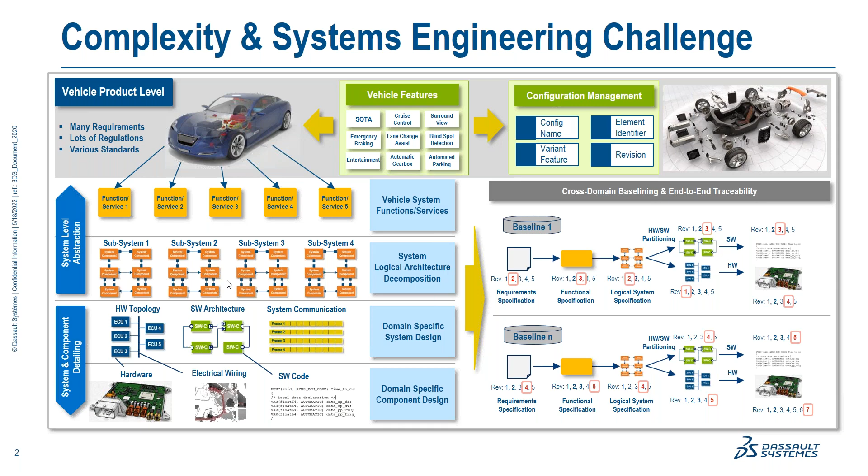And that is what we are calling, what the industry is also stating, model-based systems engineering, making really a digital continuity between and throughout all of the different domains. That's the transformation that everybody is working on now in the auto industry. And that is also a key foundation for our strategy that is based on what we are learning every day at our customers.

So on the one hand side, we are providing a solution to our customers that facilitates them to develop so-called cyber physical systems, which is nothing else than an evolution of what was called in the past mechatronics systems, so meaning systems that can be connected with other systems. So looking at, for instance, autonomous vehicles and the connection to the infrastructure, it's certainly a good example when you have an autonomous car that is getting connected and embedded into the parking system of a city infrastructure. That's certainly a good example for a cyber physical system.

And one of the key assets that we from DS bring to the table as part of model-based systems engineering collaboration is a platform-based solution that uses a data model that facilitates a digital continuity between all of these different stakeholders and members as part of the engineering processes, with the overall goal to increase and improve the efficiency throughout the entire engineering processes and to fully digitize these processes.

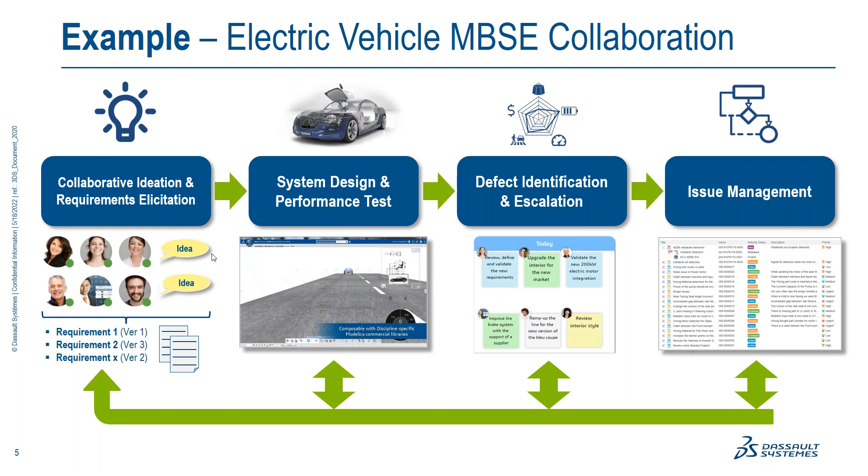And then we are also going to see that we are going to detect a problem with our current implementation. And that problem is being picked up and escalated, and we start to turn that into an issue, and we're going to manage that issue. So that's an example that shows very nicely how we connect the different steps as part of a process to bring together all of the stakeholders in a fully digitized process. All right, so let's take a look at this little example.

So what we are seeing here is the graphical user interface of the 3D experience platform, where we have the different roles, and each of the roles has so-called apps to do the job. And we are starting in 3DSwym. This is a collaborative team environment. It's like a community system where people can make posts in this community. Others can finally like it, make comments to it.

So it's about starting the ideation process on a relatively high and abstract level to gain insights, collect ideas, opinion for things that should later be turned into formalized requirements. So these are the people that are finally working on the project. You see people from different domains, each has a particular role in that project.

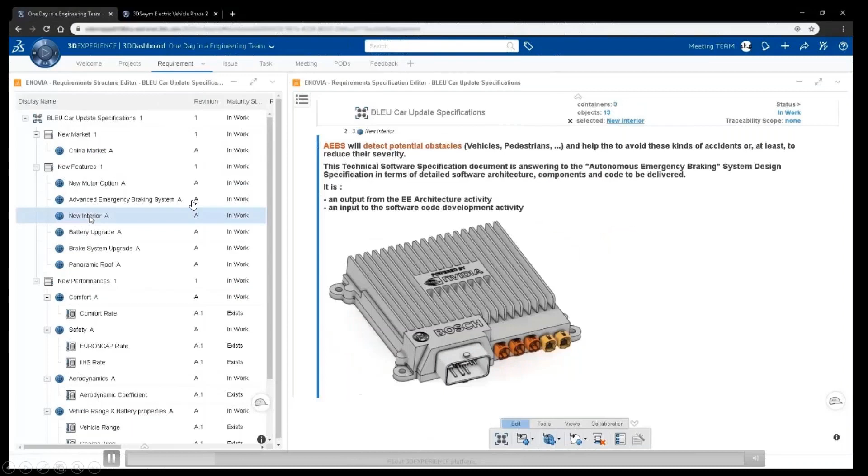So we have picked some of the ideas and started to turn it into really formalized requirements. This is our requirements management solution. You see on the left the requirements objects. On the right, you see the detailed description for each of the requirements.

So we are now going to set up a meeting with our team in the 3D experience platform because we want to review the status of our vehicle project, because there's primarily 2 things where we have some problems that we need to really investigate a bit more in detail. One is relating to the battery and the other one is relating to the powertrain part. We are currently exceeding the budget that we have been targeting, relating to the battery and the powertrain part.

And for the powertrain, we are investigating a new solution from another supplier, and we want to embed a new motor. But we have to test if the performance of that new motor is really meeting the performance needs of our car. So we go back to our requirements solution that we have seen already previously, and we have one requirement defined, which is a quantified requirement in terms of the acceleration of the car, so part of the overall user experience that we want to provide to the customers buying the vehicle.

And that acceleration from 0 to 100 should occur within a certain amount of time, and that is certainly a key performance factor that we want to now verify. Yeah, so we change that, it should be 3.1 seconds. And we have derived from our requirements a functional system architecture for the powertrain part that was created in CATIA Magic in SysML, and I then imported it into the 3D experience platform.

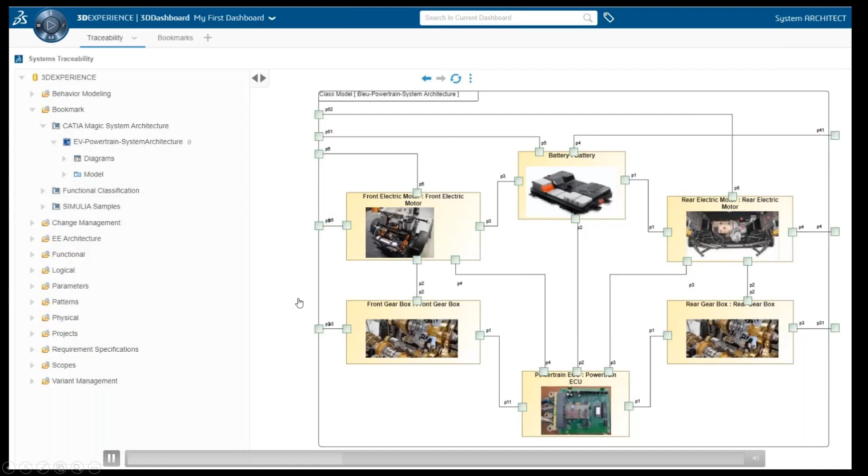And this one is going to be equipped also with a simulation model underneath to finally evaluate really the performance of our vehicle. So you see the same architecture here, and that is equipped with a simulation model underneath. So we see, for instance, here an evaluation of the performance. At the moment, we see the acceleration. It's not addressed yet. So we have to run a new test with the new system.

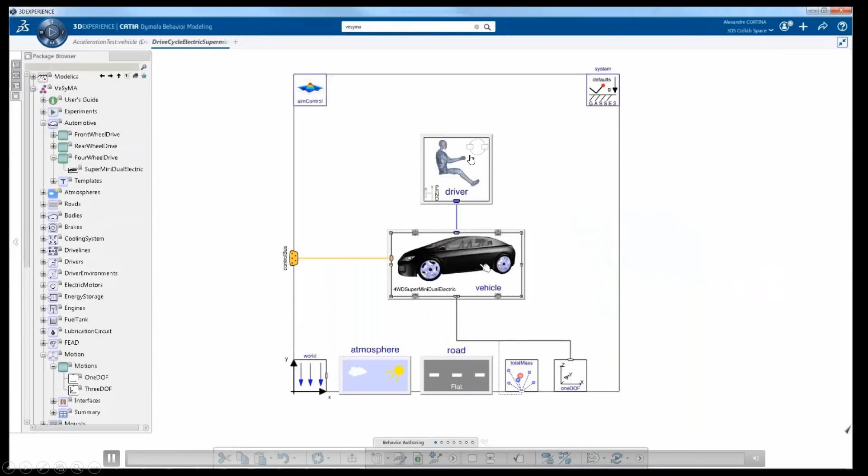And the test is being done based on the Modelica model that we simulate with Dymola in the 3D experience platform. So this is at the end of the day nothing else than an executable digital twin that we can put on the virtual test track to assess the performance of our system. We see from 0 to 100 we are at 2.9 seconds. That's good, so we have met that requirement.

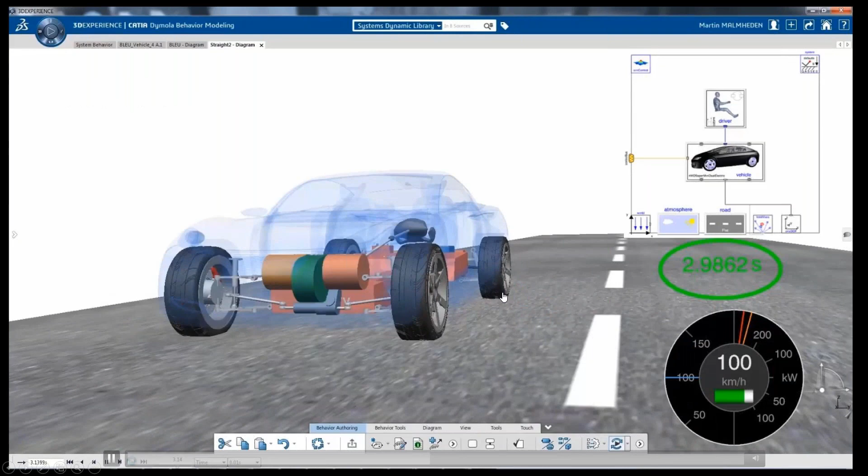Okay, but we also have another experience in our car, and we have some level of autonomy in form of an autonomous emergency braking system. Yeah, and from the test it occurred, we seem to be having a little problem with this one.

So if we have a technical problem, that means we have an issue here. So that means we need to file an issue against that because we want to resolve that. So that's another continuity. We can directly go from our requirement solution into an issue mode. So that means we can start to create an issue directly from the requirements, give it a description to say, okay, the obstacles are not properly detected.

And then we want to also escalate it because we are really getting to our deadline. And it's actually a high priority, of course, and it's a defect that we have encountered here. So we give also a hint for the resolution because we have recently made a software upgrade, and we believe the problem is most likely relating to that. But at the end of the day, it's up to the guy that finally has to investigate the implementation, or is in charge of the implementation. So the test procedure is actually specified also in the test specification, a different document here in the platform.

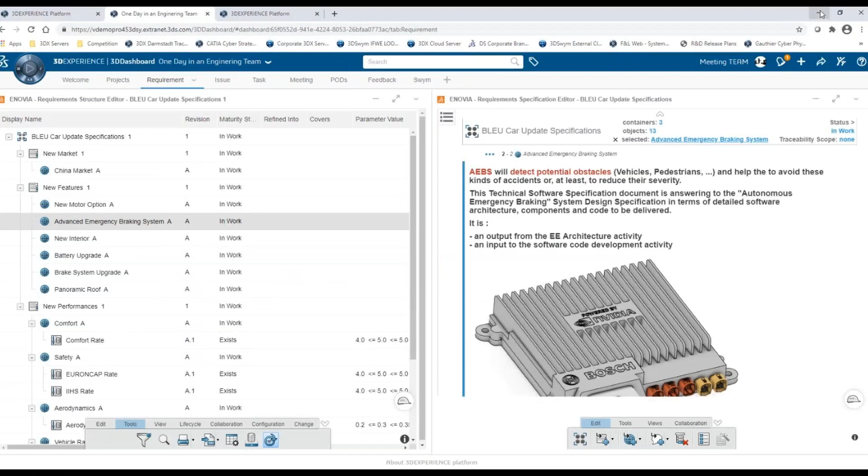So now we go into our issue management list from here. So we switch the view. We go back into another tab of our dashboard solution. And we see here, there's a new issue that has been created. And you see the list of issues where I am actually involved in. And it's the new one that I just created. And you see the test case is automatically associated to it because I've right away created it from the requirements app.

Now I can add also additional information. I add also the artifact of the software to the test case itself. I don't have to, but the more precise I am, the better it is to understand the issue and to deliver all the attachments to it. And now I have to assign also a person to that. In this case, it's Romain, our software engineer, who is going to follow up and is now in charge of pursuing and fixing that issue.

I think this example here gives you a very first idea of what we mean when we speak about a digital continuity as part of a model-based systems engineering collaboration using the 3D experience platform to fully digitize an engineering process. Of course, there would be other pieces following after the issue creation, but for a first part, this is already a well-digitized process.

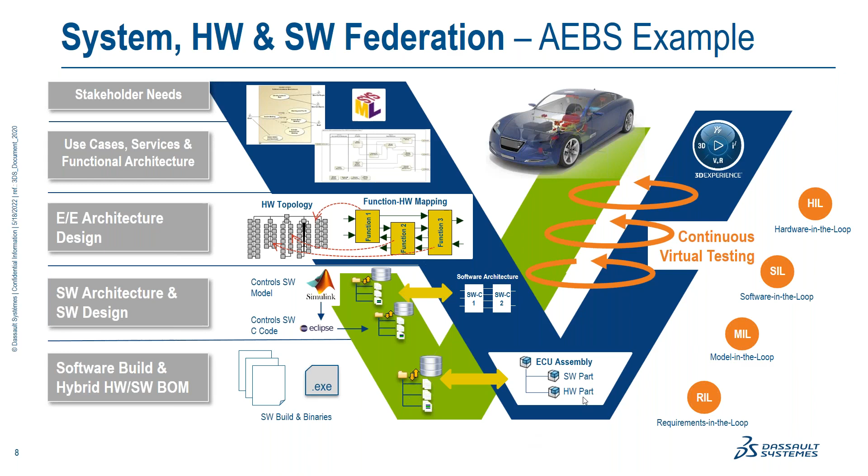We will see in the next demonstration how we can keep up continuity between all these different assets and content by building full end-to-end traceability from the initial requirements, over the architecture, down to the EE architecture, into the software architecture, and even into the software code hosted outside of 3D Experience in an external Git repository. We can even go so far as to build a hybrid BOM, a mechatronics BOM, where we combine hardware elements and software elements.

Before we go into the demonstration, one of the things we've seen initially is that, aside from the actual creation of engineering content, we also have the capability to build continuity between the actual project management and the engineering execution.

We often see at our customers that for the project management part of their complex projects, people use software where they sketch out the complete project plan, including the schedule, the tasks, and finally the resource planning to make sure everything is staffed and on schedule. That software does the project planning quite well, but usually it doesn't have continuity into the actual engineering execution, particularly into the tools used by the different engineering teams.

This is very different with our platform-based solution. When you use our project management solution, you sketch out the project plan and the different tasks, and all of these tasks have direct continuity into the actual engineering execution. That means when you define a task, it shows up in the collaborative task management dashboard of the engineer who has to work on that particular task.

You can assign or attach inputs to that task, such as a specification that helps the engineer do the next level of downstream engineering work, and he can return the artifacts he has created. The benefit of that strong continuity of project management into engineering execution allows you to keep full track of where you are with your project.

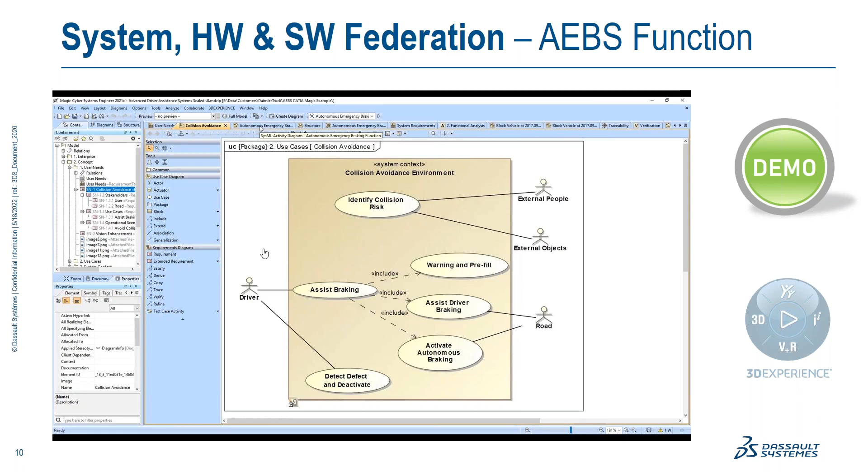Okay, so let's take a look at another demonstration that shows how we bring all of these things together, in particular for the AEBS system, and now not only the engineering execution that we've seen in the V diagram, but also combining that with project management.

What we are seeing here when we start this demo is actually our project management app in the 3D experience platform, where you see, for instance, the schedule of our project. We have a project space here with different phases of the project, individual tasks, and people assigned to them. You can also display that as a Gantt chart, which we will see later on in the demonstration.

So there's a couple of things that we have to work on. One task is, for instance, defining the vehicle functional system architecture. That will be a primary task now in the beginning. We also have a KPI view for the projects, where you see at a glance where I am right now with my project, and where we have some problems that we finally need to follow up on.

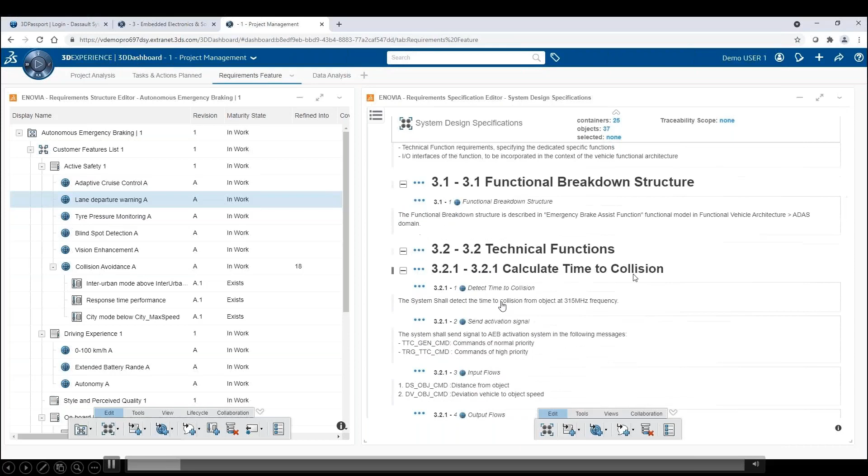All right, so let's start now with the actual engineering execution work. We have queried out some requirements for our autonomous experience. Aside from the AEBS, there are also a couple of other ADAS features that we have sketched out as requirements that should go later on into the car. Some of these requirements relate directly to the AEBS system.

So these requirements that we've authored in the 3D experience platform can be directly synced with CATIA Magic through Data Hub, which is a solution to bring the requirements directly into CATIA Magic. That can happen fully automatically - you don't need to move around any files or something like that.

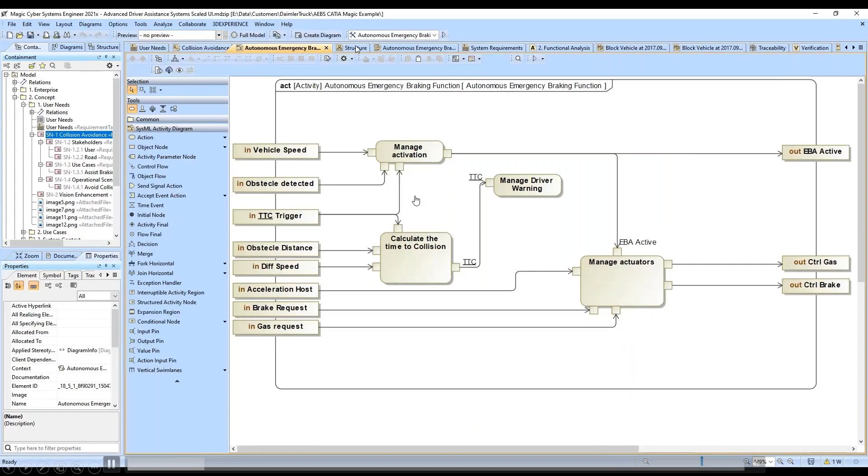So now we have these requirements in CATIA Magic, where we are using SysML to do an analysis of those requirements and to sketch out later on a structure of our system that should then be implemented. That means we take these requirements, start to build use cases fully compliant with SysML, and investigate the functions and services using activity diagrams that will be needed to materialize the requirements. Then we end up with a first level structure for our system.

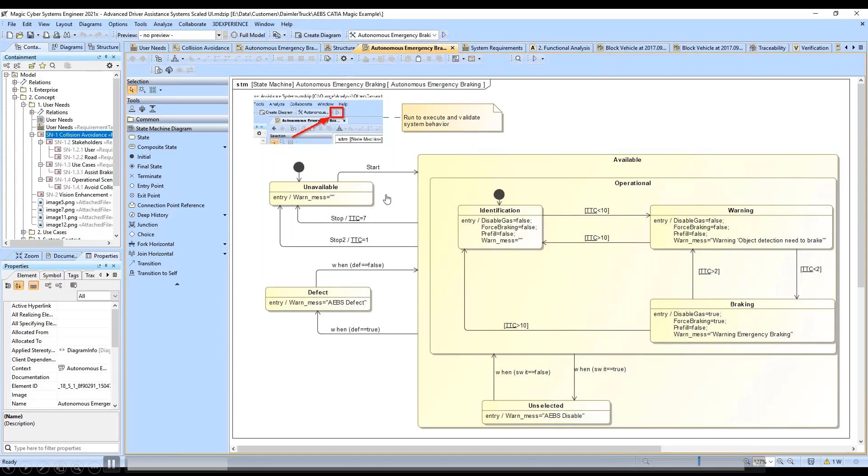And of course, in order to describe the behavior, we have created a first algorithm in form of a state machine that reflects and mimics the behavior that we expect from the AEBS system. The really powerful thing in CATIA Magic is we can simulate all of that stuff - we do not need to produce code for that. We can do that right away in the model and run a simulation of the functionality to assess if the behavior of the algorithm is properly materialized.

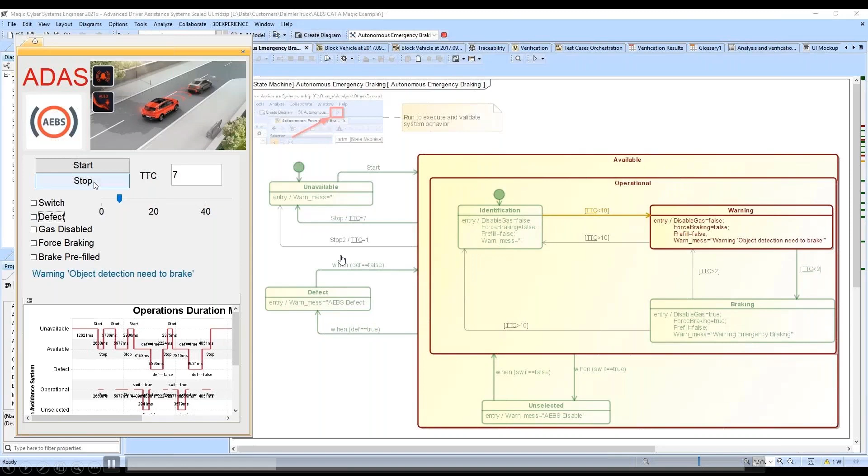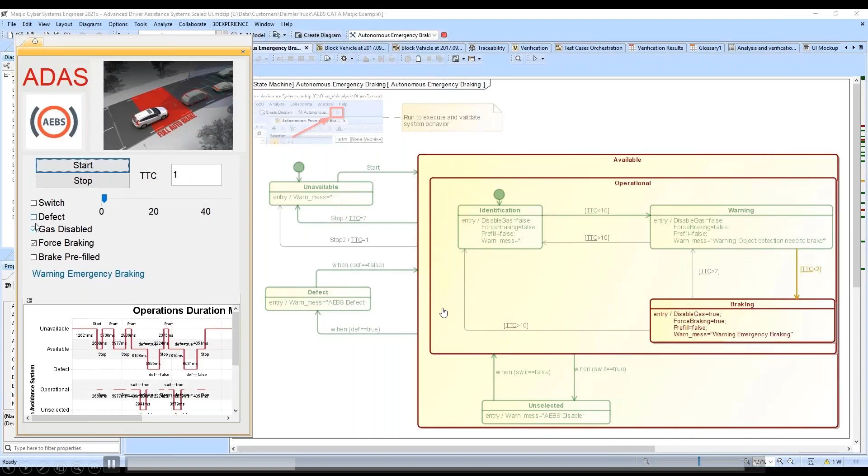So we are playing around, for instance, with the time to collision here, but also look at different conditions - what if we turn on and turn off the system, or if there's a defect? We see the algorithm moves into the proper mode. And then we decrease, for instance, the time to collision, meaning the car in front of us is getting very close, and it's getting super close. Now it means we have to deploy a full brake, and we see the algorithm is doing the right thing. So we have first tested our system and we see it's properly functioning.

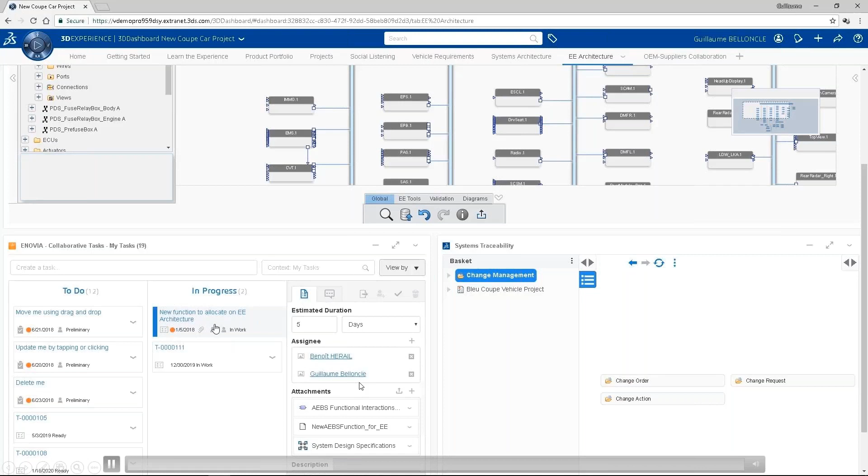And we have directly attached also from the upstream part all the specifications that were created upstream, so that we have a continuous starting point for the guy that is now in charge of the allocation for the EE architecture. You see on the one hand side the textual requirement specification, and we see now the functional interaction chain that

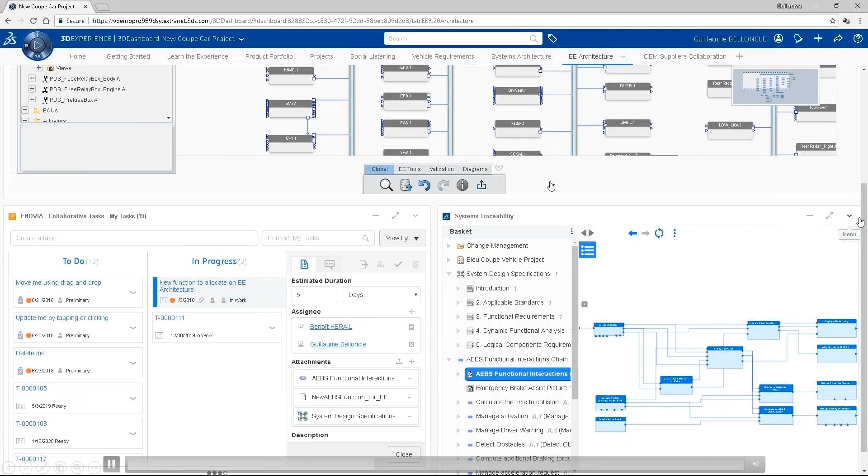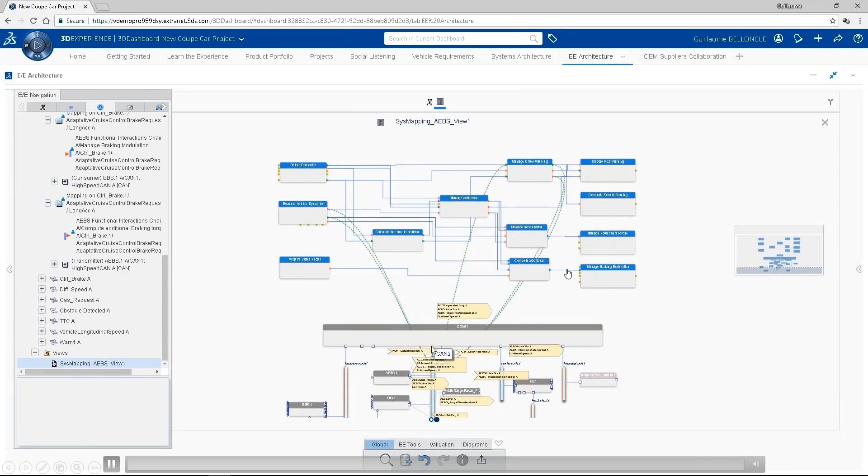was previously sketched out in CATIA Magic. So this one has now been allocated onto the EE hardware topology. I've done that already up front. And we see when we select this function here, we see on which ECU this is going to be hosted. Or if we do it the other way around, if we select one of the ECUs, we see which functions

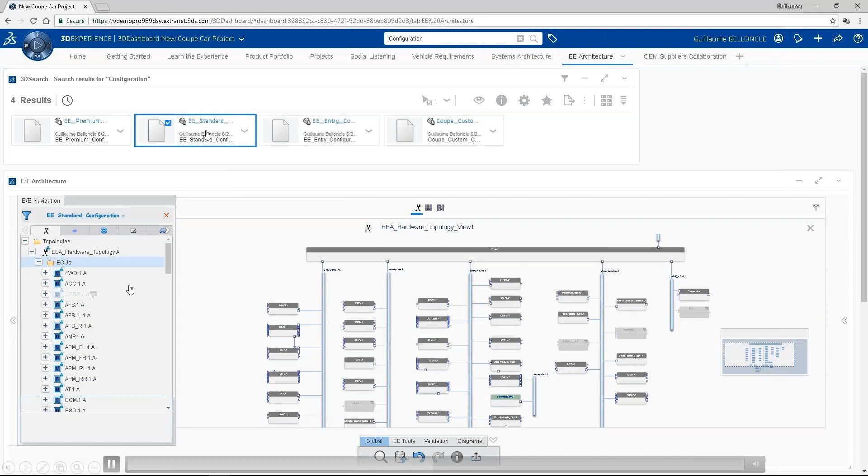it is hosting. So very nice traceability of the allocation. This stuff is also fully integrated into our variant and configuration management, which is an important part for automotive applications. So I have a bunch of configurations, vehicle configurations here defined. When I apply them to my system specification, I see that some components are grayed out. These ones are not belonging to these configurations.

So you can very easily do variant configuration management based on the 3DEXPERIENCE platform. We can also do some first computation and estimation, for instance, of the bus load of the system.

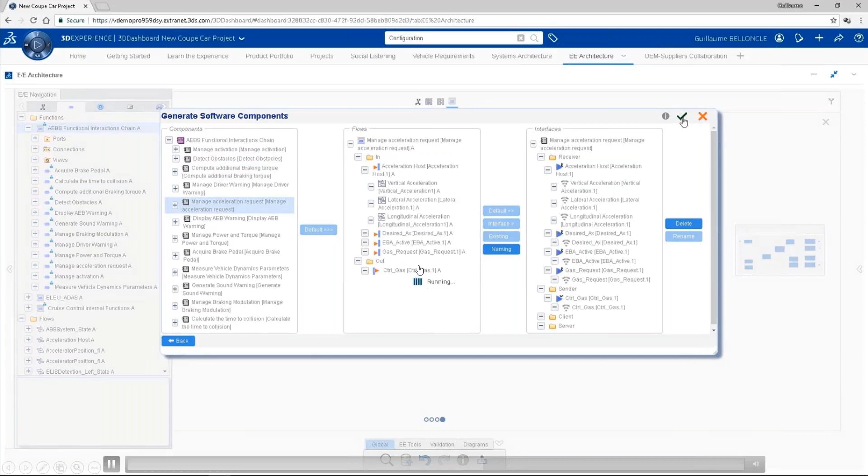So in the next step, we need to get now from a functional architecture to a software architecture. And as previously said, we have a continuity in the platform where you can synthesize that automatically. You also can do that manually if you prefer. We provide both ways to do it. But this is part of our digital continuity in the platform. So that will be the software architecture with the different ports and interfaces.

As I said previously, at the end of the day, we want to get down to an AUTOSAR compliant software implementation. So what I've done now based on the software architecture that I previously synthesized, I've taken a small part of that and exported that as an AUTOSAR XML file and brought that into our DS AUTOSAR authoring solution, which is called AUTOSAR Builder. This is a Dassault tool where you can do the authoring for the AUTOSAR application layer software.

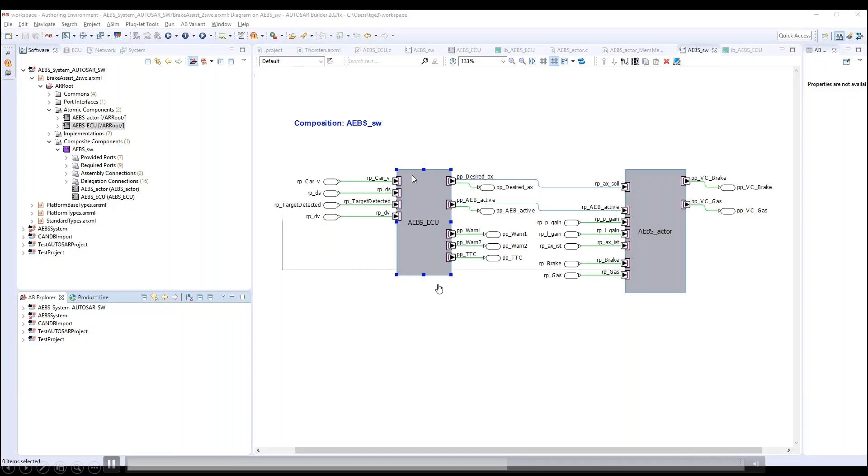So we see a software composition here, including two atomic software components, which has been authored in a fully AUTOSAR compliant fashion, where you have the different ports, for instance, for the atomic software components. When we go onto one of the atomic software components and go into the details, we will see the different port definitions, and we will also see that this atomic software component also has an internal behavior.

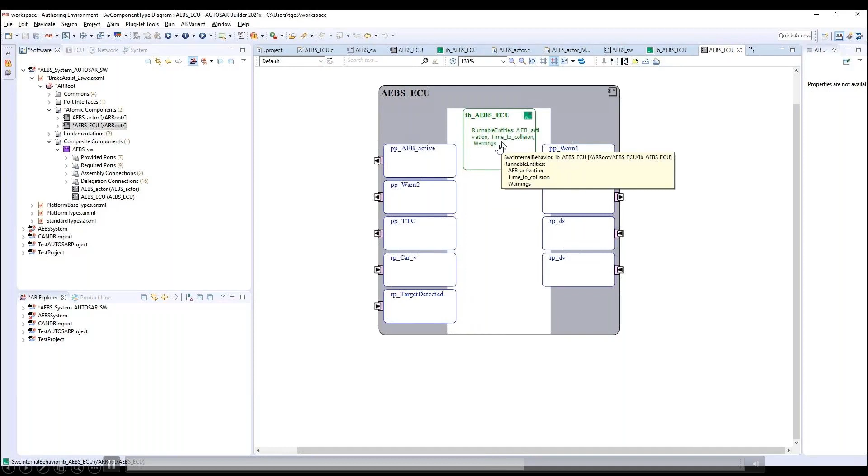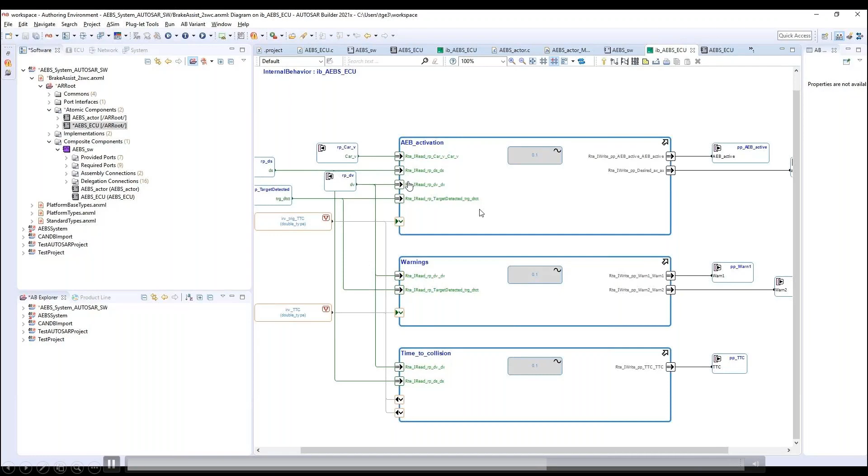This is part of the more detailed refinement now to do really the detailed AUTOSAR-based authoring. We see, for instance, 3 different runnables, and each of these runnables is becoming exactly one C function later on. So fully compliant with AUTOSAR, where we also have the RTE access points and APIs that let these functions talk to other functions in the car. It's a very important thing and part of the AUTOSAR standard, because it makes it very easy later on for

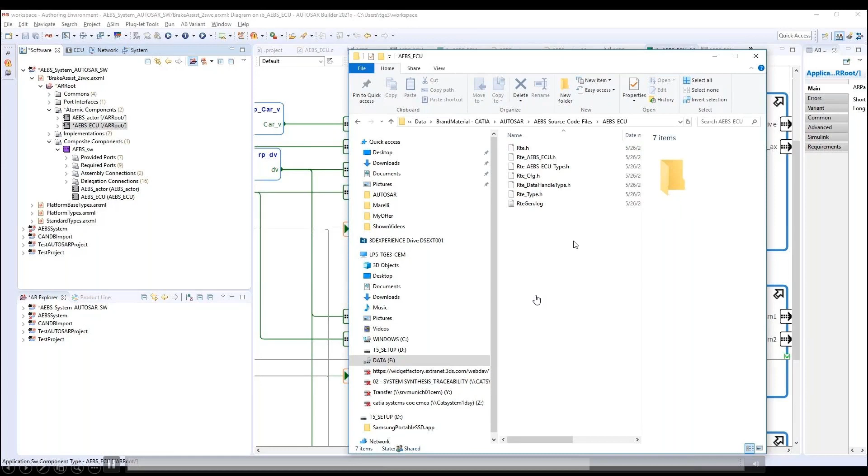the application software developer to connect this application code to other software components. So one thing that we can do now is the so-called RTE Contract Phase. It means that we are producing all of the header files that include the RTE API descriptions, because this is part of a contract, for instance, between OEM and supplier, where the OEM may deliver, for instance, the header files to the supplier to specify the interfaces, the inputs and outputs.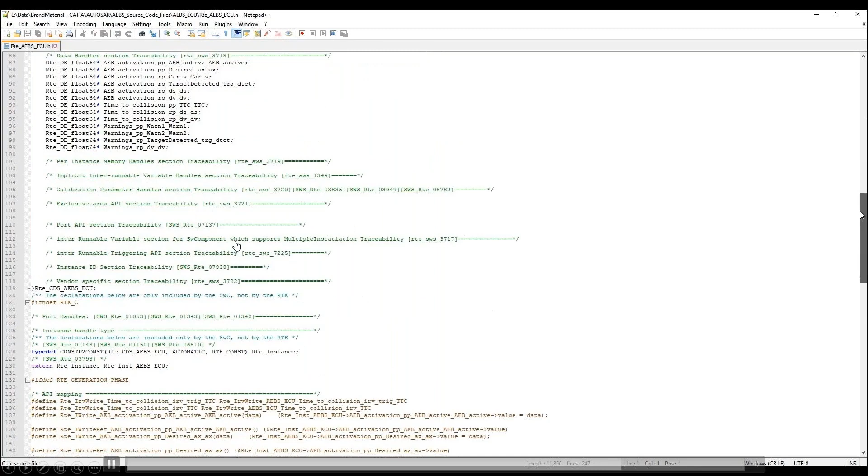So we see the different RTE API functionalities, and these are the functions that later on the software developer would use to connect his software function to the inputs and outputs and have it communicating with the rest and other software functions. We can also produce for the different runnables templates, so which are then primarily the bodies of the C functions that would later be deployed on an ECU, so turned into a binary and flashed onto the ECU.

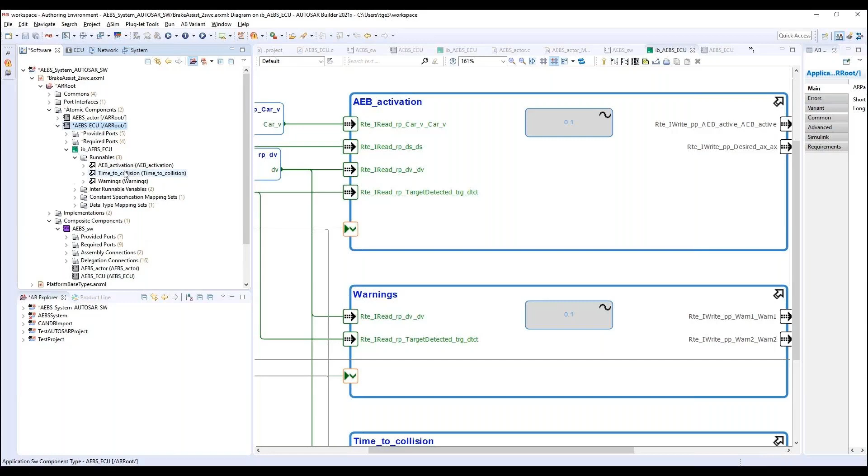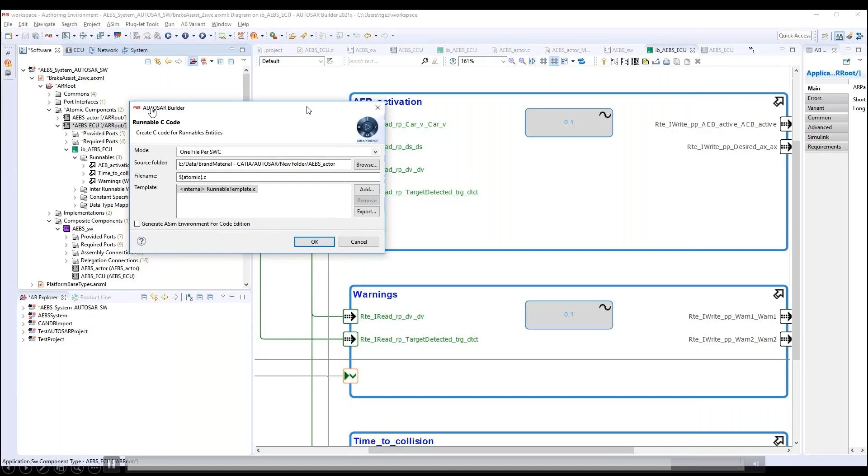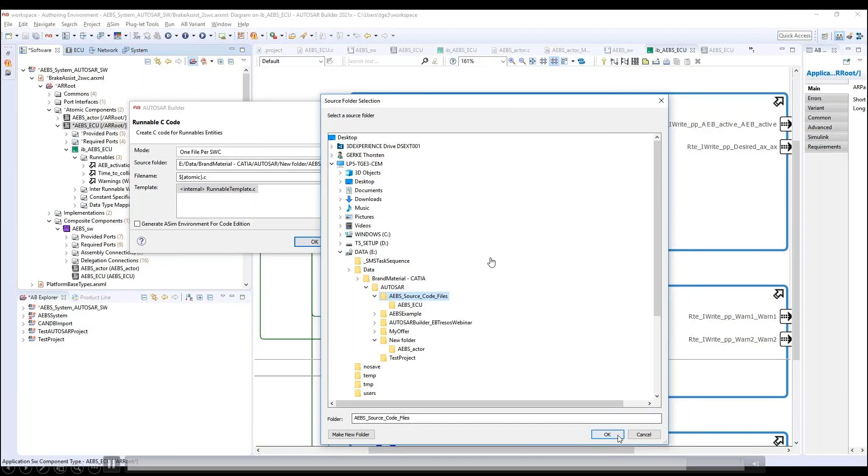So we have a couple of templates that are predefined. When we go to runnables generator, we can use one of the default templates. You can also create your own template, and then we can produce from that description here some predefined bodies for the different C functions. So we just select the place where we want to store that material, click on OK, and then we produce the code or the body for the different C code functions.

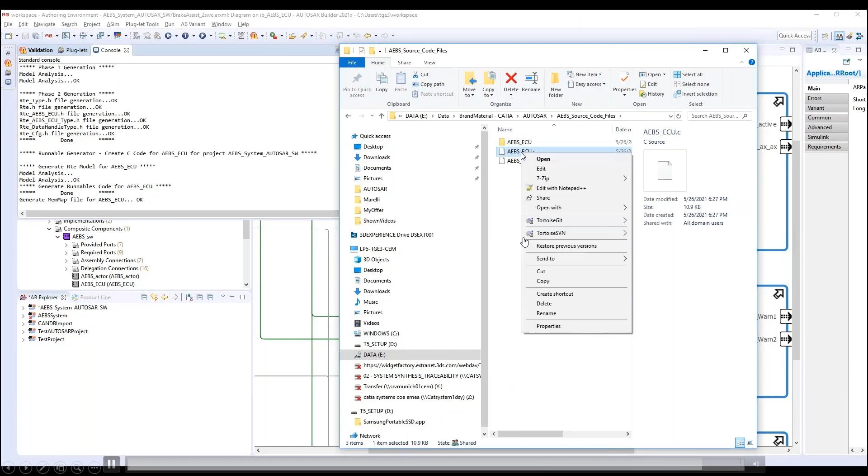So when we open one of the source code files, we see, for instance, here on the one hand side, the header file that was previously created in the RTE Contract Phase.

And further down, we see then a definition of the runnable, where we see the body of that function predefined. And we have here the inputs, the outputs that were part of the RTE Contract Phase definition. And the application developer can then place his code here and connect that to the inputs and outputs. So very easily.

All right, I think that's also a very interesting example that shows another facet of a continuous approach in a model-based systems engineering fashion, how you can develop a software-based function, really starting from the initial requirements over to the design of a functional system architecture using CATIA Magic and SysML, and then go into the detailed domain design of an EE architecture and further down to the software implementation. So this was, let's say, continuity on the design side, on the left side of the V.

But what I've said previously is also that we can do an end-to-end traceability. So what do we really mean with end-to-end traceability, and what's the value of using traceability at all? People like you that are working every day on these kinds of applications, I'm pretty sure many of you are also dealing with standards such as ISO 26262 or Automotive SPICE. And these standards, for instance, explicitly demand traceability in the entire process. And there's a good reason why that is the case.

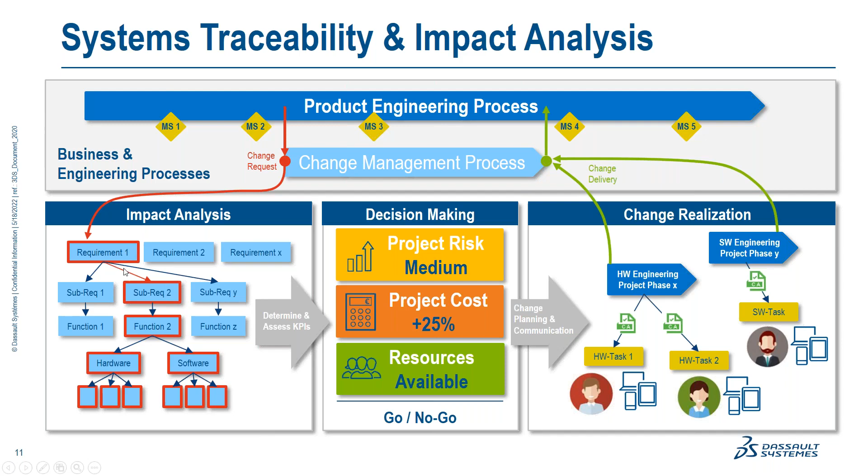And systems engineering, in the form of a model-based systems engineering approach that includes an end-to-end traceability, can exactly address that task. Meaning you can quickly figure out with an impact analysis, if you have full traceability, what are the things that are going to be impacted if we were changing that requirement. So how can we do that? Let's take a look at a typical example of our customers in the auto industry for an end-to-end traceability.

So this example here, aside from showing the end-to-end traceability, also aims to show the openness of the platform, because we are bringing content together from various external resources, repositories, and databases. So we see here, overall, again our AEBS system that we have seen previously, but now in a traceability view.

We have here on the left a whole bunch of requirements. We have, for instance, some requirements that were created in DOORS. These requirements are also managed in DOORS, and we just look into the DOORS database and make that part of the traceability. We have some requirements also sketched out in PDF and Word, and we can build that into the traceability too. And then we have our functional system architecture that was carried out in CATIA Magic, and the data is stored in Teamwork Cloud, so also managed externally.

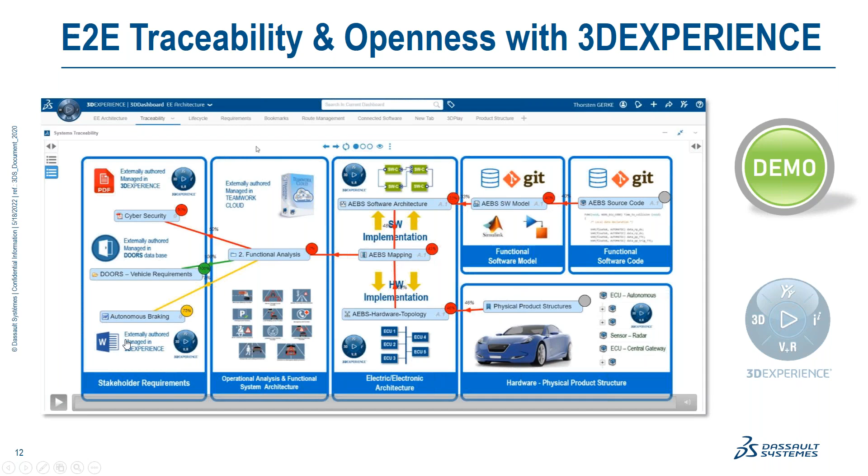And then we have done the partitioning, which pieces go into hardware, which pieces go into software. The software elements, for instance a Simulink model for the controller as well as the source code implementation, are both managed externally in Git repositories. And then we have a hardware part that relates finally to the ECU, and that's managed directly in 3DEXPERIENCE. So let's take a look at how we can do traceability on all of that.

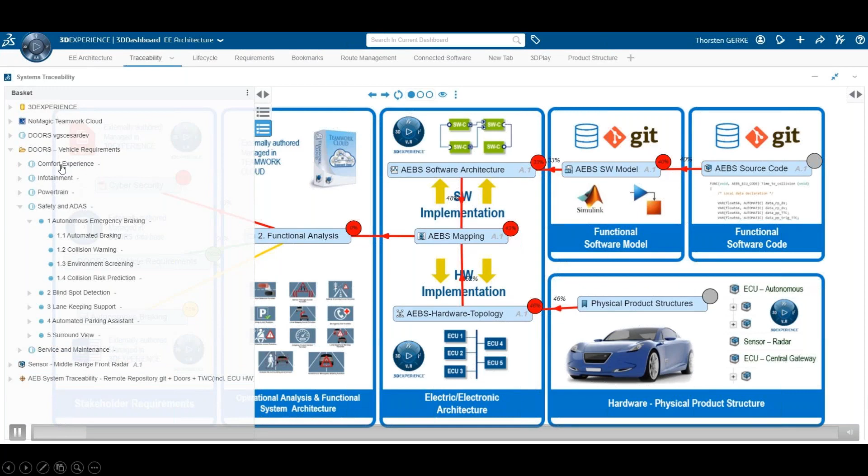So the first thing we want to look at: you see here in the tree all the requirements that are available in DOORS. This is the DOORS client here. I've created some functional requirements in DOORS and stored them in the DOORS database. And we just link into the DOORS database, so we don't duplicate any information. So let's go into the traceability graph. We see these lines here. These are the traceability relationships and links between the different artifacts on the different layers.

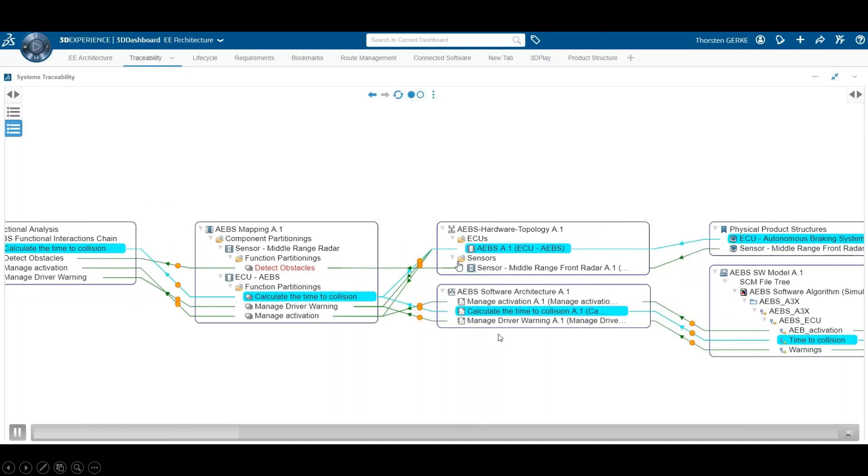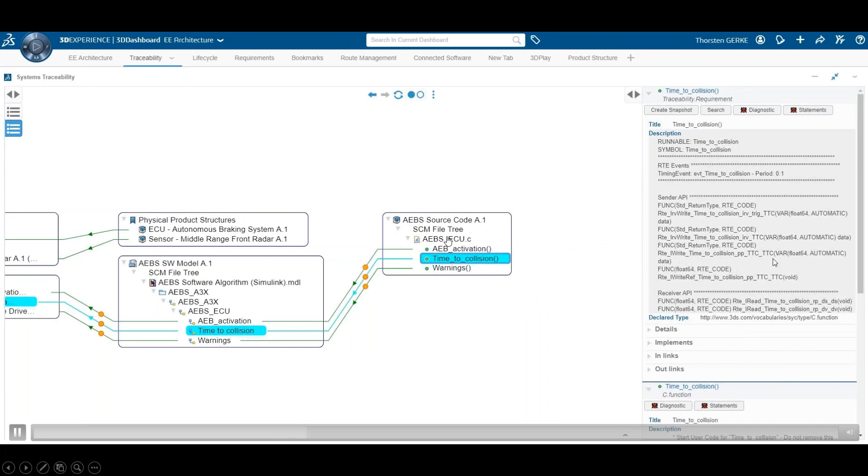And when we select the requirement in DOORS, we see in impact mode right away which elements in the downstream path would be impacted if we were changing that requirement. And this goes even down to the software, which is stored in an external Git repository. Now you see the impact analysis right away points us to the function in the code. So we do not need to search for it. The impact analysis does the job for us.

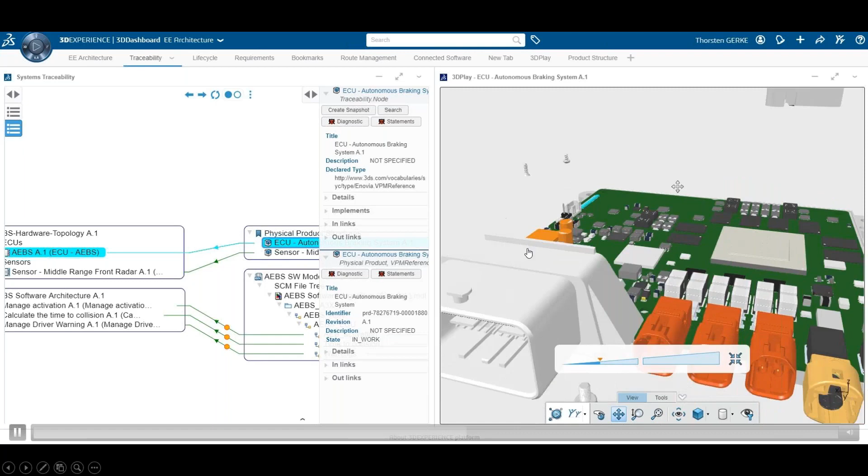From this engineering BOM here, we see that element was also affected. This is, at the end of the day, the 3D CAD for the ECU that would finally be impacted. And we can go down to any level of the traceability. You always need to make a trade-off. How far do you want to go with the traceability? Because it's something that also needs to be maintained over time.

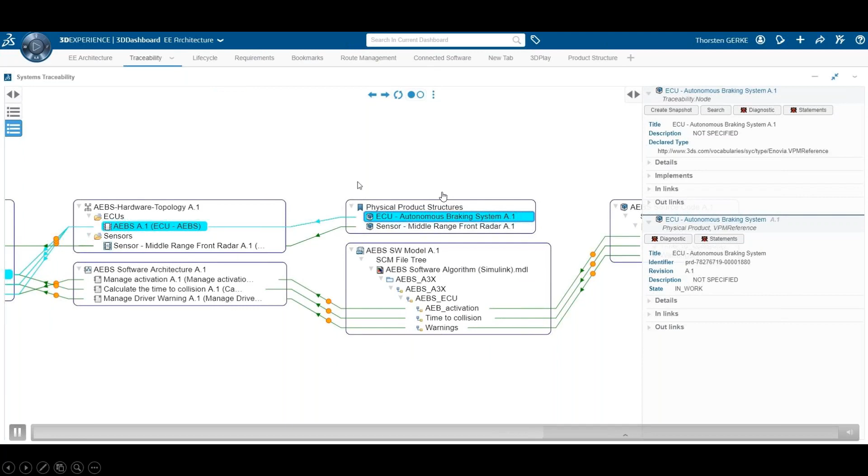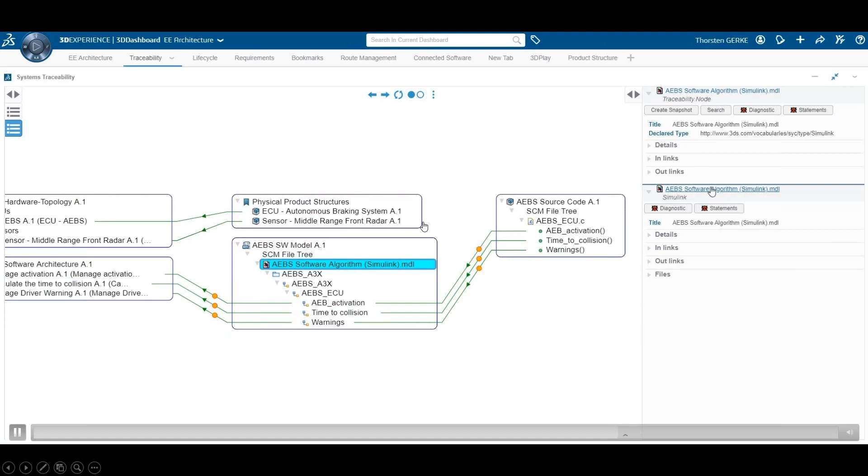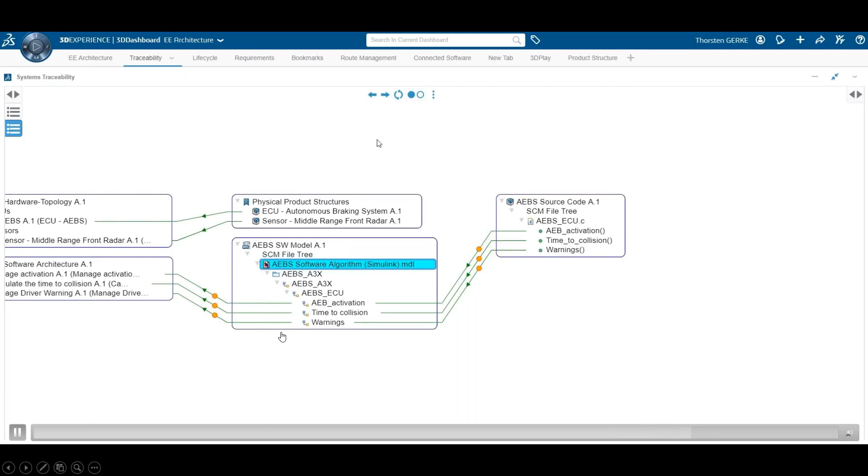So let's go back to the requirements that we had created in DOORS and select the requirement again. We see in the downstream path we also have a Simulink model, and that's an interesting aspect of our solution. We can view the content of the models and diagrams without having the tool on the machine. I don't have Simulink on my computer, but I can still view the Simulink model. This is very useful when you want to review content with other people.

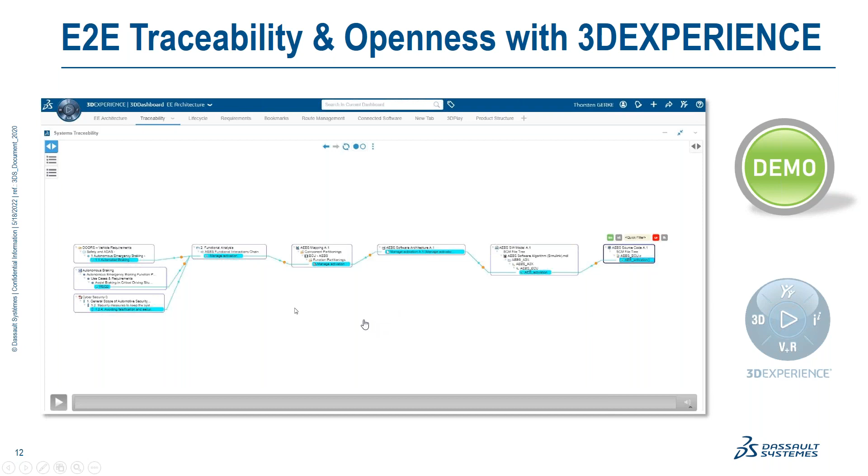We can do the same for PDF documents. I have labeled a bunch of requirements in the PDF document and can do the same impact analysis. And we can also do it bottom up, not just top down, to see, if I change something downstream, with which requirements I still have to comply. So this is one very short example and snapshot of what you can do with end-to-end traceability.

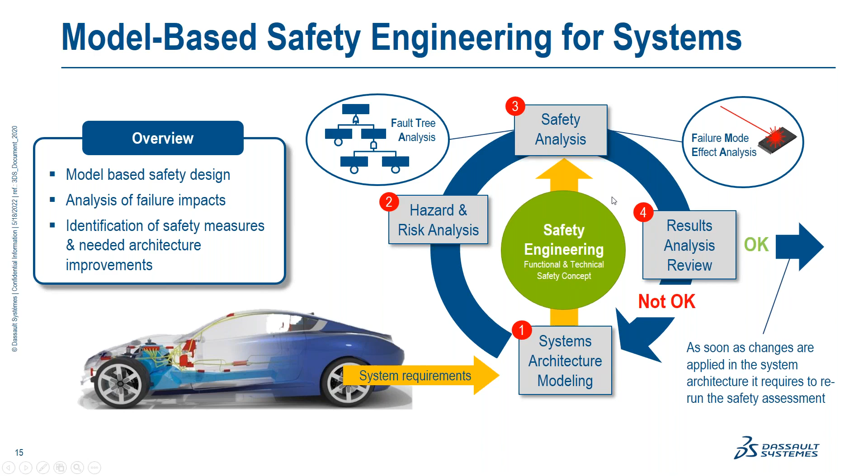In order to support that process really well, the system architecture is, of course, let's say, in the center of all of these activities. And our system architecture design tool is CATIA Magic Cyber Systems Engineer based on SysML, where you create the functional system architecture. And we have a couple of solutions to support the safety engineering process extremely well.

One of them is, for instance, the ISO 26262 functional safety plugin, which is based on the new OMG RAAML standard that allows you to carry out the complete hazard and risk analysis. This is a multi-step process, which is then the starting point to derive from that a functional safety concept. And we're going to see that later on in the demo, how that works.

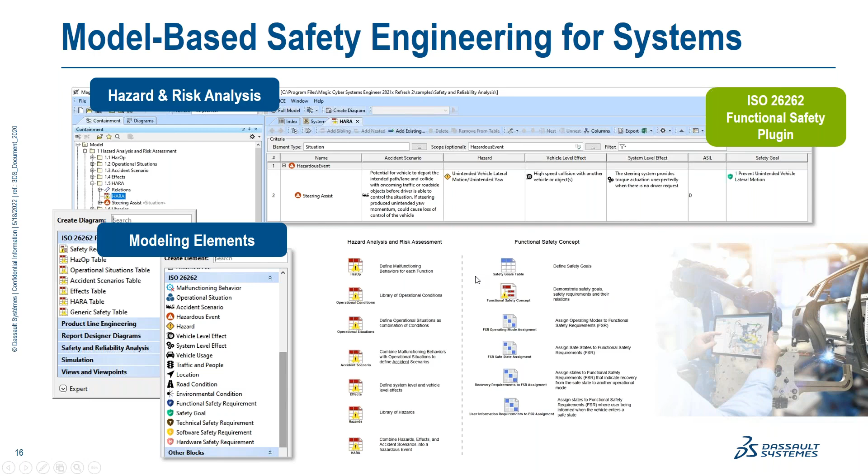The analysis is something that you carry out on the system architecture model directly in CATIA Magic, where you go through the architecture together with other reviewers to figure out what are the things that could go wrong in that architecture, what are the malfunctioning things, and how could that propagate throughout the system? What are the things that we need to insert into this architecture to ensure that this is not really starting to become a big hazardous problem? And that information and introspection goes then later on into your FMEA table.

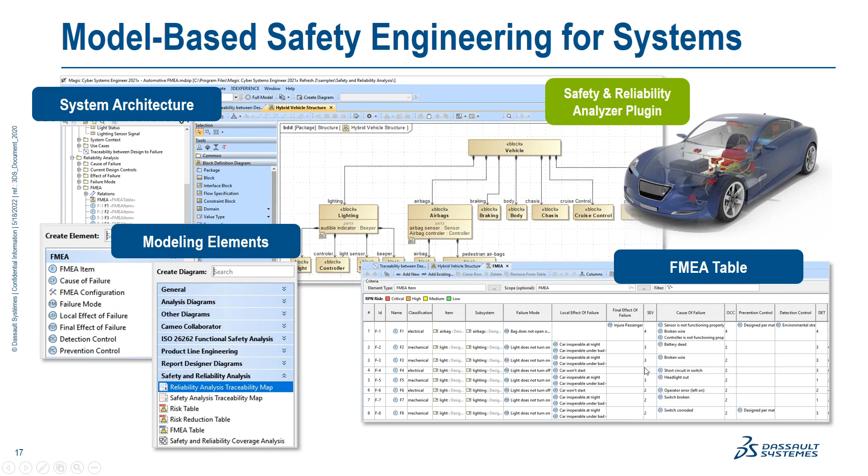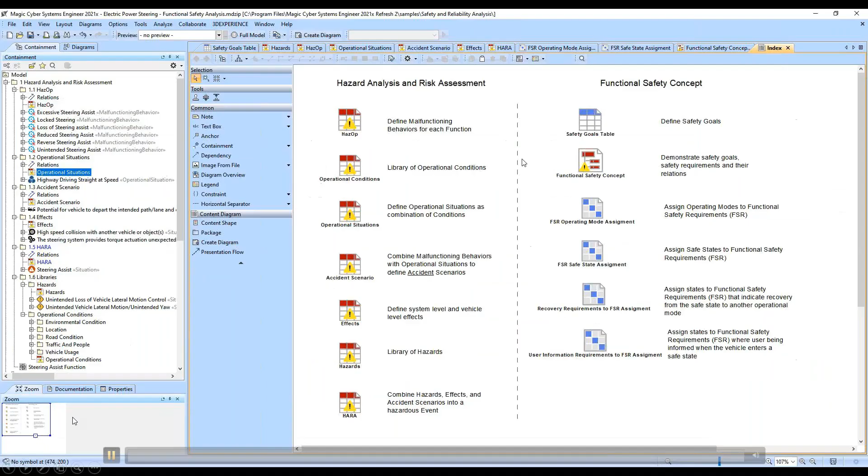So let's take a look at a quick demo in CATIA Magic, how we can use these solutions in order to do safety engineering for systems. So we are going to start in the first step to look at the ISO 26262 plugin, how we carry out a hazard and risk analysis, use that to derive from that a functional safety concept. And in the second step, we also look at how we can use the reliability plugin to do, for instance, FMEA analysis. So these are different steps to carry out a hazard and risk analysis.

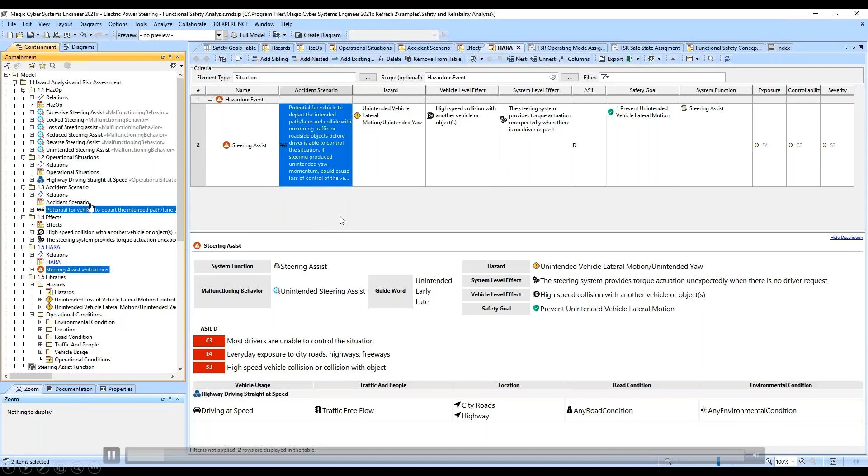And this here is a HARA table where we have one of the hazardous events. We see which function is finally relating to that, which ASIL has been derived from it, and what safety goal have we defined for it. And all of these are elements of the model that have been previously identified and created. And we do here the aggregation of all of that.

So if we start at the very first, we identify first what are the top level functions that could fail and what is their potential technical problem. Without specifying any hazard here, it's just about looking what could go wrong from a technical standpoint of view. So in the second step, we look at possible driving scenarios, really just the driving situation that could occur. And we also say, okay, what's the level of exposure? So how frequently can that finally happen?

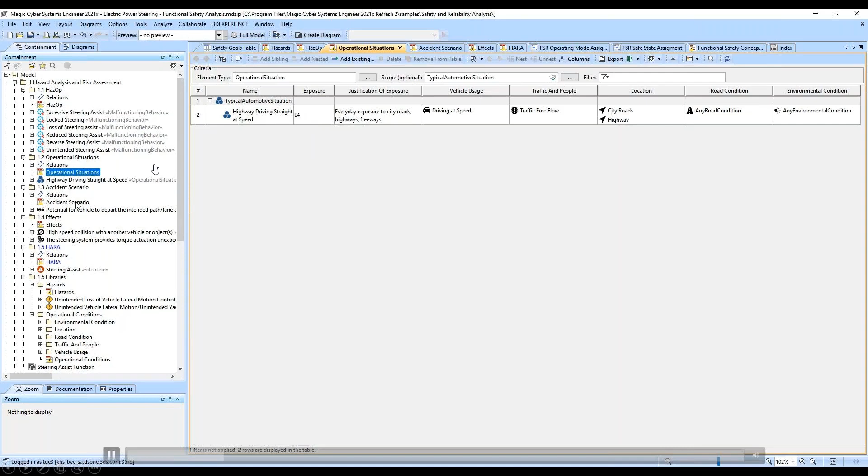And then we bring these two things together and look at the possible accident scenario. So we have this malfunctioning behavior and what accident scenario could occur and how controllable is this by the driver. And then we end up with identifying what would be the overall effect of that. So we identify the severity because this is important. Then we have the three factors in place from which we can derive the ASIL. So this is being automatically determined. It is defined in the ISO standard, how it comes together based on these three factors.

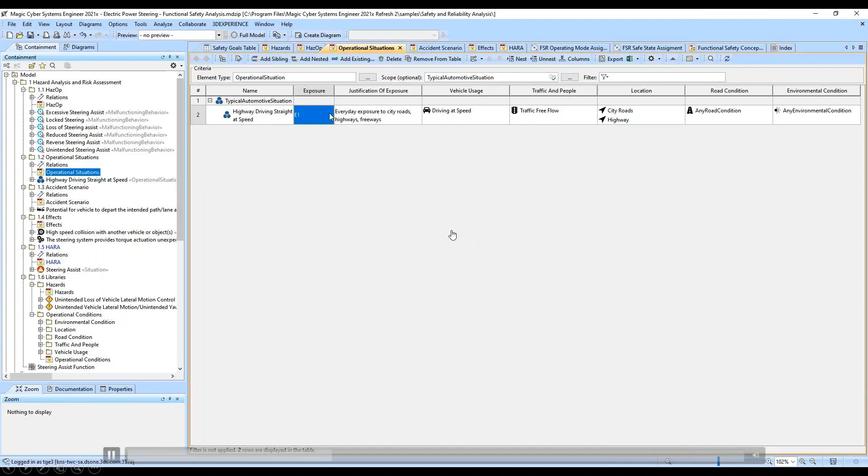And the really important thing is all of this data is linked with each other. So if we change, for instance, in the driving scenario, the level of exposure, you see in the HARA that it automatically changes this here, and it automatically also changes the ASIL because the data is linked with each other, and the ASIL is a function of these three factors. So if we go back and change that value for the exposure back again to what it was previously, then we will get to what we initially had in this HARA table. So if we change it again back to exposure level 4, we see, okay, we are now at the point where we have been already previously.

And we aggregate, for instance, also automatically all of the safety goals. In this one, I've just defined one. Usually you have a very exhaustive list when you work on a bigger system. And that is the starting point to start sketching out the requirements as part of our functional safety concept, where we have the top level requirement as the safety goal. And then we start to derive and do a decomposition of the different requirements that we need to embed to make our system safe.

And if you want to do an ASIL decomposition, we have also special stereotypes for the relationships. So if you want to further decrease the ASIL because you have ASIL D here and you say, okay, I want to decompose it into two components to decrease the ASIL level, we have specific stereotypes to label that. And then you can further drill that down into the different requirements for the different technical domains.

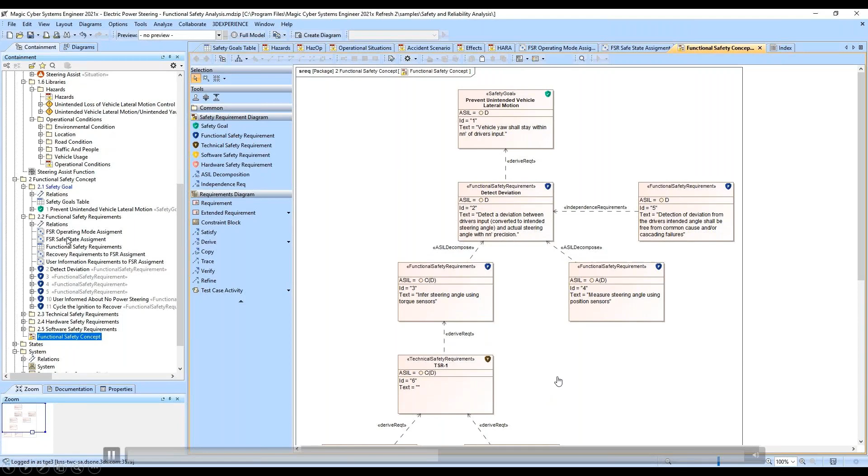Of course, when we talk about safety critical applications, you always want to make sure we also have a safe state. So for a steering assist system, in the absolute worst case, you could say, okay, we turn that functionality off. That might be a possible safe state. So how can we use now the reliability plugin to carry out an FMEA analysis?

This is a different system here, where we're going to do an FMEA analysis, for instance, for the lighting part of this vehicle system. Creating an FMEA is very easy. So we go to the FMEA table, we create a new FMEA item. We select to which domain it relates, in this case the electrical one. And the system under consideration is actually this one here.

So later on this light instance is actually instantiated in that system here. So we pull that now directly from the architecture. And that's the continuity as part of a model-based systems engineering approach. You take the part property from the system architecture definition and actually embed it into your FMEA analysis.

Yeah, so that's the part property that has been instantiated here. And that is actually the instantiation of that subsystem as part of the overall vehicle system. So full continuity between system architecture and the FMEA table. So now we need to define also the failure mode. I've done that already up front. We have specific stereotypes for that.

I say, okay, the light does not turn on. That is the failure mode of that system or that component. And then we also need to say, okay, what's the local effect of that failure? Of course, if the light doesn't turn on during the night, we lose the illumination in front of the car. Makes it hard to detect, for instance, other obstacles.

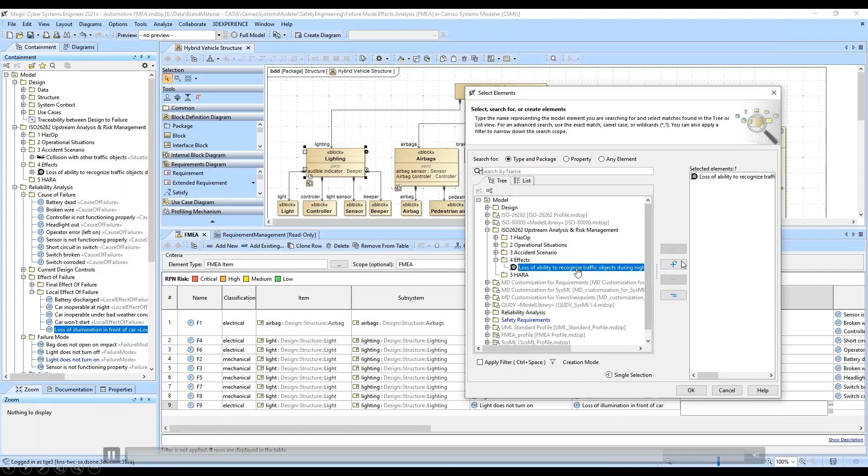So I say, okay, I lose the ability to recognize traffic objects because the illumination in front of the car is not available. So then, of course, when we do an introspection of our system architecture, we also understand much better what's the cause of the failure. So in this case, I say, okay, the sensor that's finally in charge of detecting the illumination is not properly working.

And last but not least, we said we also want to use this analysis to create new requirements. In this case, I say, okay, if that functionality is not working, I want to inform the driver about the malfunctioning of the lighting system. So I've created a new requirement object here and added this to my FMEA table. So full continuity also between system architecture, requirements creation, and the actual FMEA table.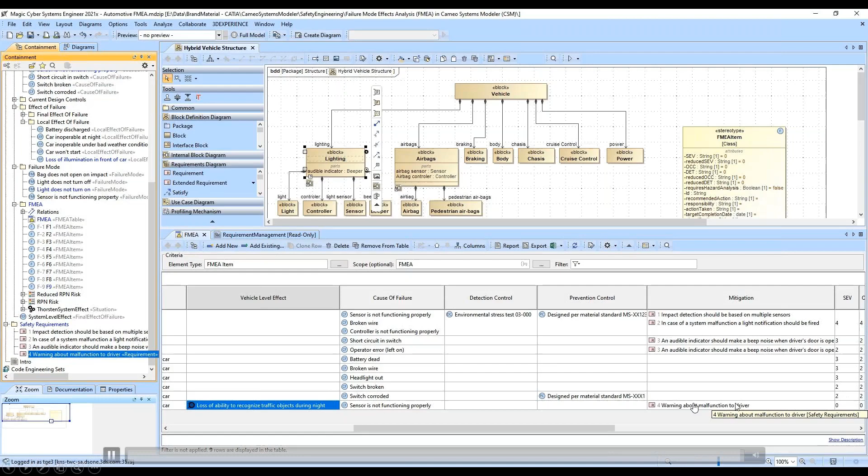Yeah, I think it's a very nice example that shows how you can use a model-based systems engineering approach to ensure continuity between design and analysis.

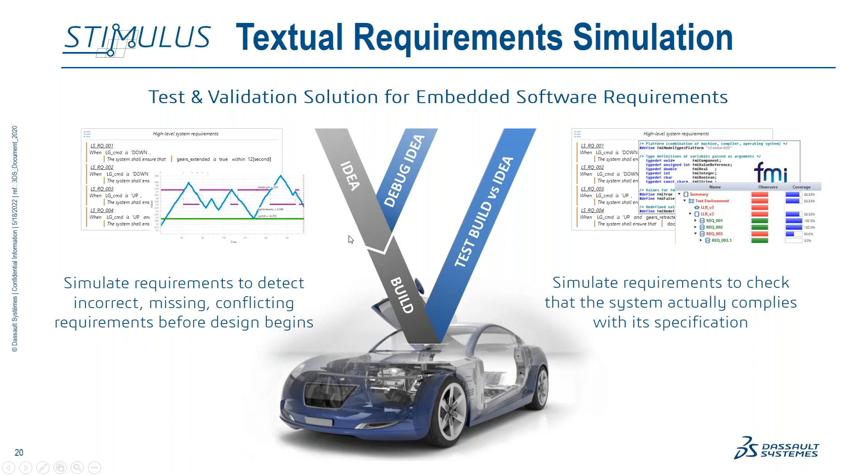So for that, I've set up a little example for today. It's a little headlight example, which from an architectural standpoint consists primarily of four different things. One is the headlight that is supposed to illuminate our surroundings. We have a little controller that controls the operation of the headlight depending on the input, meaning we have a switch that can turn on and off the light manually, or when you put the switch into auto mode, we have a light intensity sensor, and depending on how much light intensity is detected from the environment outside, the headlight is turned on and off.

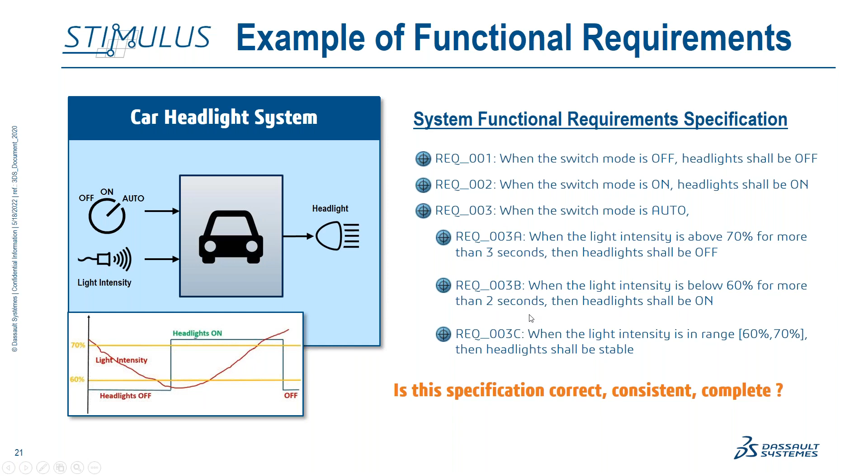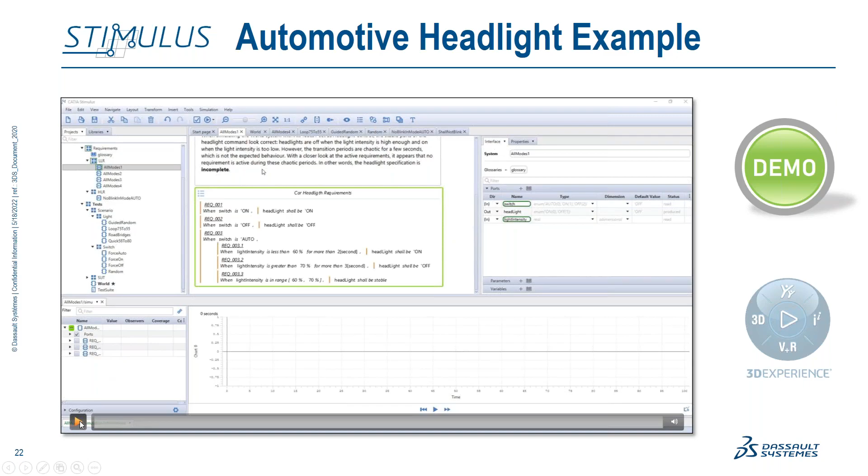So let's use our powerful solution, Stimulus, to put these requirements into Stimulus and simulate and figure out if we have done a good job on the definition of the requirements. So you see here the requirements, and they are written really like in a natural language. You don't need to have a complicated modeling language.

So I've created a test bench to test these requirements. The switch, I have a sensor for the light intensity that produce input signals, stimuli, and behind this are finally the requirements that model the functional behavior of the controller. I've defined different levels for the requirements. When I double click on this box here, I see again the requirements that we have sketched out previously.

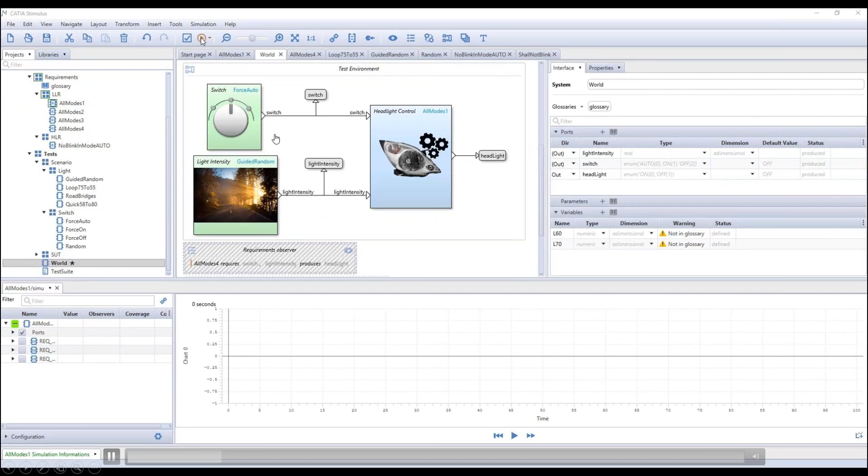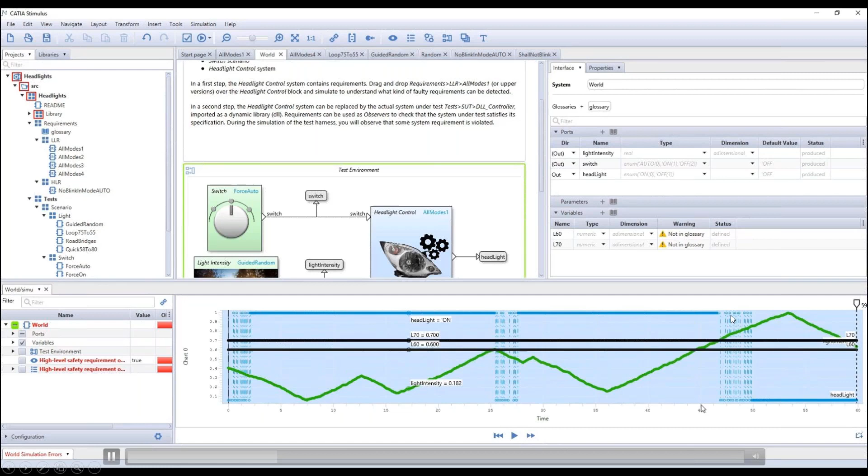All right, so this system already allows us to do a simulation of the requirements. Let's simulate a couple of steps here in Stimulus. So the green curve is actually the light intensity. You see this changing over time. We have two horizontal bars, the 60 and 70%, and the blue curve is the headlight. We see already there are some areas where we have these dashed lines. The dashed line is always a bad sign, because it means that the behavior of the system is not defined at these points in time. Let's go a bit more into the details to see what is happening here.

So when we select this headlight signal, we see at this point here it's a solid line, meaning it's clearly defined. And we see, for instance, here when we click on that, one requirement is active.

So the gray ones, these requirements are not active, so we can easily debug which requirements are active. And this is a powerful thing in Stimulus. If you go one step further, we see all requirements in gray, none is active. It's quite simple, because we are beyond 70%, but the 3 seconds have not elapsed, and we have not stated here what happens in between.

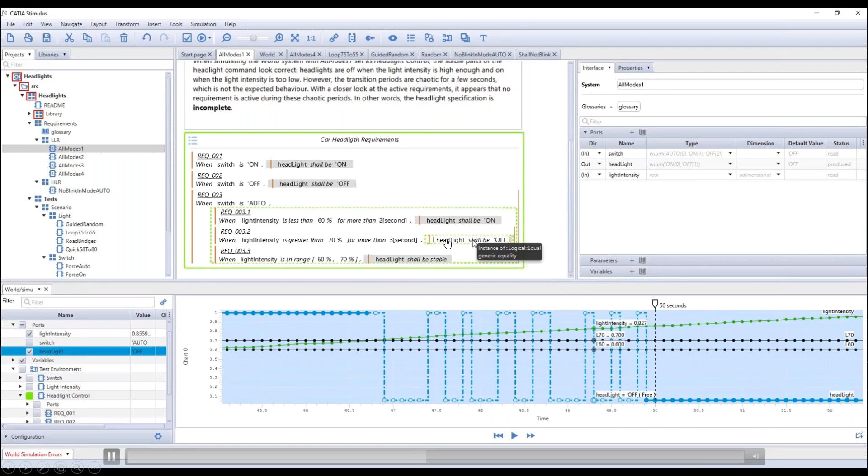Now we just said after 3 seconds we want to switch the light off, but we haven't said what happens in between when the 70% are crossed but the 3 seconds have not elapsed. This is also the reason why you have this dashed line here. The behavior of the signal for the headlight is not defined, so we have a hole in our requirements. Once the 3 seconds have elapsed, we see the requirement here is becoming active. We have one requirement active.

So let's do something stupid now. We have now looked at the first example where we figured out a missing set of requirements. Our requirements are not complete. Let's look at a set of requirements that are now conflicting.

We add another requirement here and say when the switch is in auto, headlight shall be on. We know that this one is wrong, because when the switch is in auto mode, we want to have the headlight controlled by the light intensity. So there should be a conflict coming up.

Okay, let's simulate that system too. We see right away there's an error message coming up, and Stimulus has detected there's a conflict. So there is actually a condition requested that we should have 2 assignments to that headlight signal that are not defining exactly the same.

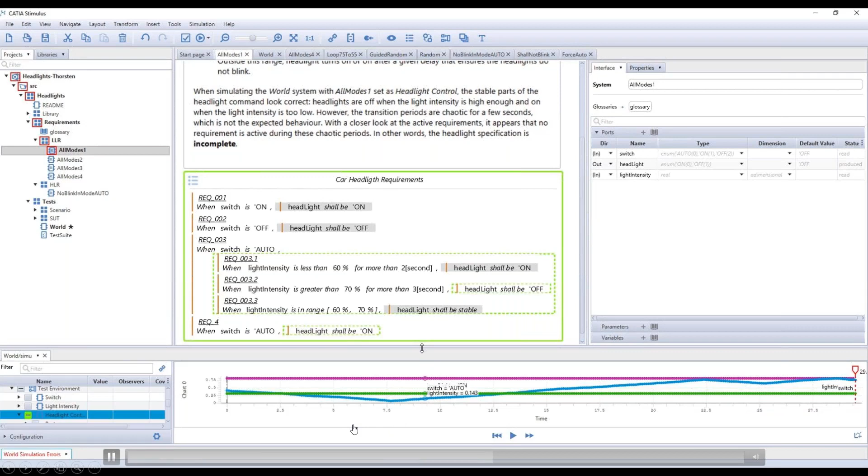So let's look into the details. What is happening here? So when we go to the area where the problem has been detected by Stimulus, we can see that there is actually 2 requirements active at the same time, and both are stating something differently. We say okay, headlight shall be off and headlight shall be on.

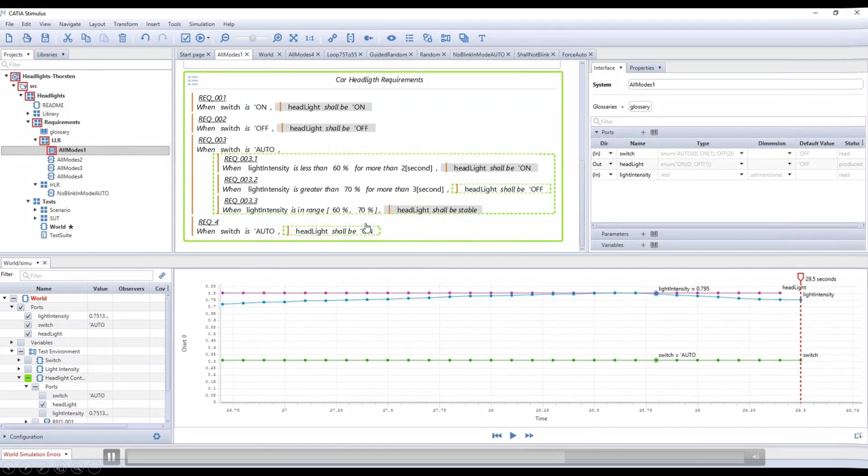How can this be? Well, when we go back a little bit in time, we are here above 70%, but the 3 seconds have not elapsed. Previously we had a missing requirement. Now we have this additional one that covers this. But this becomes a problem when the 3 seconds have elapsed, because this one is now also becoming active. So it means we have now 2 conflicting requirements. Yeah? So this is the power of Stimulus, all these debugging capabilities.

And of course Stimulus is also connected with the 3DEXPERIENCE platform, because aside from simulating requirements, we also want to manage the requirements data. And it's again a task that is being done directly in the 3D experience platform.

So I've created a requirement specification here, which is empty in 3D experience. You see there's no objects in it. And what we want to do now is push these requirements directly from Stimulus into the 3D experience platform to manage the data in the platform.

So I connect to the platform and say into which requirement specification I want to move these requirements objects. Now I export in the next step the requirements. I select the ones that I want to move over, and now I can actually move them over into the specification in 3D experience.

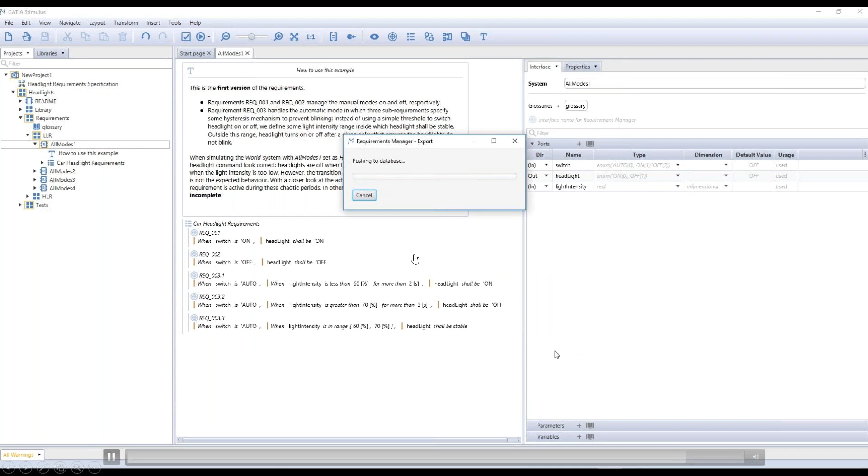And once we have defined that step, we can push the OK button, and then the data is going to be exported to the 3D experience platform. And we can also do it the other way around, that we pull data from 3D experience. So it's a bidirectional process. Stimulus simulates the stuff and 3D experience manages the stuff.

So we now see that the requirements have been exported into 3D experience. See, all of them have also a revision. And this is the detailed set of requirements that we have pushed into the platform.

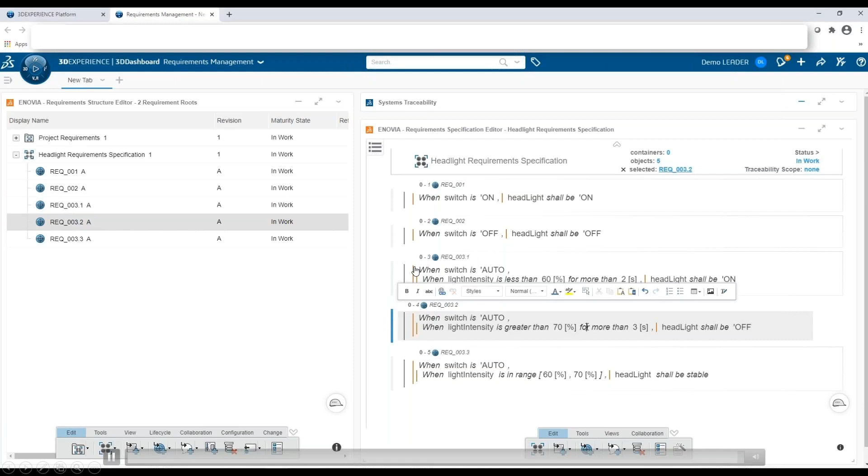All right, I think this is also a nice example to close this webinar. I hope you have enjoyed the different use cases and also enjoyed the demonstrations that we have shown. There's many, many more things that we can do with our model-based systems engineering solution, but of course we have just a limited set of time available. But nevertheless, so I'm still here.